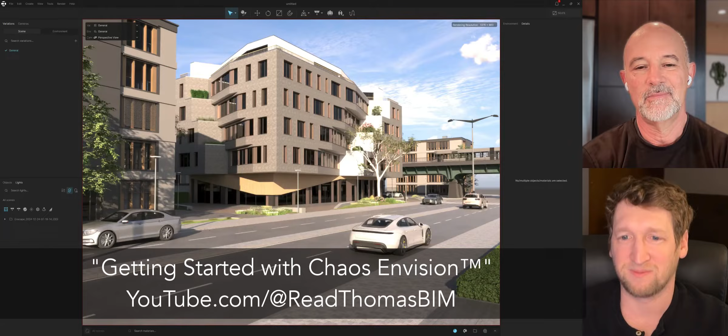When we met last time, it was the day before Christmas. Did you have a good Christmas? Yeah, I had a good Christmas. Awesome, what'd you get that was interesting? Anything interesting? Obviously, I got some cool socks. All right, you got it. Yeah, clothing is always fun. Stocks of socks.

We should have Thanksgiving, like that last bit of November, every month. You get together with friends and eat. My family, we do this. We've been doing it for like 20 plus years now. We play Monopoly, so it's me, my mom, my brother, and sister. It's a tradition. It's just huge smack talking. Every year it's like we're not family right now, we're enemies right now. We get really intense and serious about it, but it's fun. It's something we look forward to every year.

So any obscure rules that have evolved into your family's tradition? I've heard we play it wrong. I'll post the start of it on Facebook, and we have a bunch of family and friends that comment on it every year, like, "You're playing it wrong," or "That's not according to the rules." So I'm waiting for Monopoly to comment on it one year. Are you having fun though? Oh yeah, it's a great time. My mom started it when we were kids, about 20 plus years ago, and we've just been doing it ever since.

We did the free parking thing wrong apparently, so we recently changed the rules. I think we're playing it correctly now. Yeah, whatever's most fun. Smack talk and Monopoly. What'd you get that was interesting? I got a T-shirt that says Casa Bonita Dive Team 1974. Okay, that's cool. If anybody knows what Casa Bonita is, there's a documentary on Netflix about the renovation of Casa Bonita. I would highly recommend. I'll have to check it out.

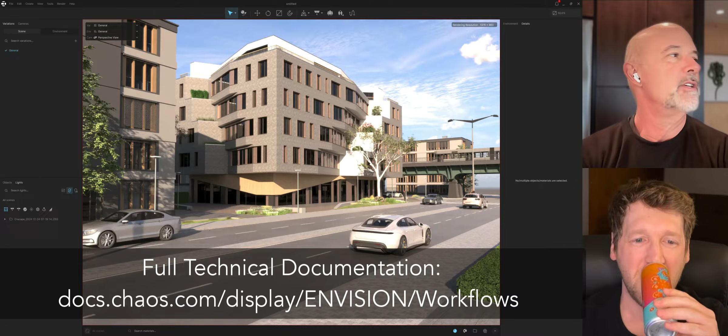All right, so we're going to talk about Envision today. The last time we chatted about this, it was more of an introduction, like how do I get my stuff out of my design tool and into Envision, and then a quick walkthrough, nice and light, 15 minutes. Today we're going to do a deeper dive, so we don't even need to open the design tool. We're starting with Envision, so let's talk about where this fits in the workflow. If you're in your design file, say SketchUp, and you push start, there's Enscape.

But then you want to take it to the next level. Or let's say you have a really big project, or you want to include the site file and you've got files from both. What's the problem you think this is solving? This will handle large scenes. I'm sure a lot of us experience this when a file gets too large. What's a large scene? Like, gigs? Okay, that's big. Gigabyte files, multiple linked files in Revit, or another really cool thing is if you are working with multiple different design applications.

So say you've got the structure in Revit, and this cool crazy facade in Rhino or SketchUp. You've got multiple different design applications, or you're doing something in Vectorworks or ArchiCAD. We all know trying to combine files into one design tool and then starting Enscape is hard. Whereas with this, you can export each of your design files and combine them into Envision.

Exactly. It's also when you get really small files and you start set dressing. I find that people download soft furnishings from the SketchUp warehouse and put them into SketchUp when they're in a deadline crunch and doing renderings. They export pillows that have been designed in Max with a gazillion triangles, and it starts slowing down the model. That's exactly a stress point.

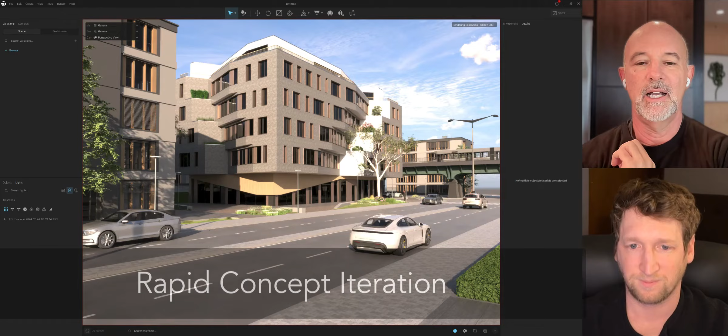Sometimes we can't make the design file do everything we need. Sometimes you need to visualize ahead of the design process, creating concept renderings without stuffing all that detail into your design tool. You want to set dress to a natural, believable level of detail without putting it all in your Revit file—because if it's not in the Revit file, you can't see it in Enscape. This environment will allow you to set dress to an extraordinary level of detail.

You can have very large files or small files that are completely tricked out. And when you need that final presentation piece, you need things that can't be done inside the design application—like animation, like people walking around, animating assets, moving things, giving that extra little life to the scene.

Enscape can do wind animation with vegetation and grass, but if you just need a person standing there doing a little movement, or you want to simulate a crowd walking naturally through the streets or something like that—that's not something the CAD or BIM tools can do natively, so Enscape can't see it.

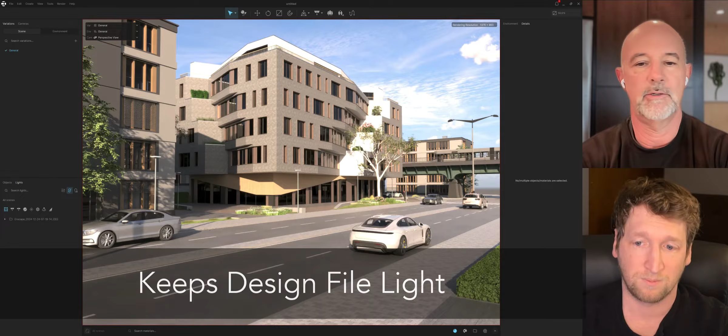So this is your new tool—you can keep it light in the design file, export to Envision, and then apply your materials, apply your lights, do your planting and vegetation, without stuffing all of that into the design file until it's resolved, until you get direction from the design team and the customers.

Another big part is if you already have projects built up where your architect or interior designer is already using Enscape, and they've placed assets like trees, and already worked with materials they want—that'll translate across. So for a campus project as you're designing, or for a large project with another phase, you can simply add that to your project.

You can further refine it inside here, and it's a 100% ray-traced environment, so you're going to get much better reflections and much better quality than you would with Enscape, and it maintains that ray tracing the whole time, unlike some other tools. It takes a little more time, but the quality is higher.

You can animate objects, and there are other features. I'm thinking in terms of—you can render animations, and you can also render still images. If you're in here and just need a still image, you could render that too.

Those are the main products you would create. This is still very much in beta, so it's by no means final, but currently you can do video and stills with it. What's really cool is one of the pain points we ran into with Enscape was you could only do single shots.

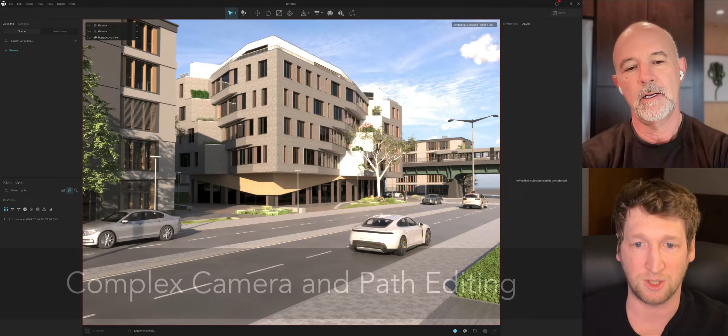You could only go from here to here to here, or around a corner. But if you wanted different camera perspectives, a more cinematic approach to a video—like a shot panning left to right, and then another going top to bottom—you'd have to create each one of those paths individually, export those videos, and then combine them in a different video editing program.

It's not just about the technology, it's the person too. If you've got someone with that cinematographic experience, Enscape is an easy tool you can use to do difficult things, but it's going to be hacky.

Whilst this seems to be a little harder tool to use, you can do things easier. It's more geared with presentation in mind.

This is where you can do more advanced camera animation, like rotating the camera and banking the camera, rolling the camera. That's something I'd love to have in Enscape, but we can't do it exactly yet. So you can do all that with inside of here. You can attach cameras to paths, and animate along the path too, and animate all that independently.

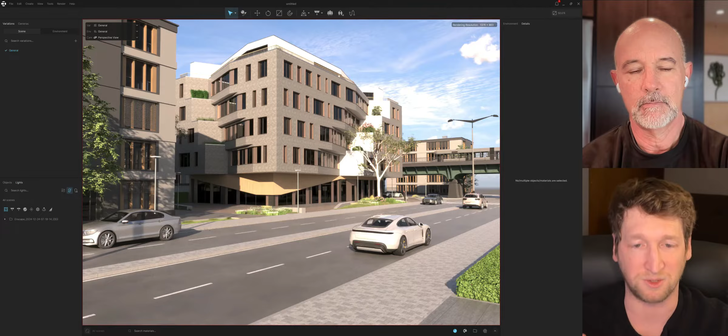And you can also edit or animate objects that came from design applications. So like a simple door opening and closing, you can do all that inside of here as well.

So let's do lights turning on, turning off, or something. What do we want to do, lighting material animations? Is that a good deep dive?

Talk about lighting. The thing is, from my caveman brain, early in the design project, I don't put lights in the project. I just put studio lights because I don't want to put individual lights in the ceiling, but I do want a lantern effect. So instead of going through this process and putting all this detail in my Revit file, when things are going to move and change, I just use a studio light. So let's say this project has been exported, but there are lights in it, or there needs to be more lights in it. What is that next step to affect the lighting and to see how that effect is going to take place in real time?

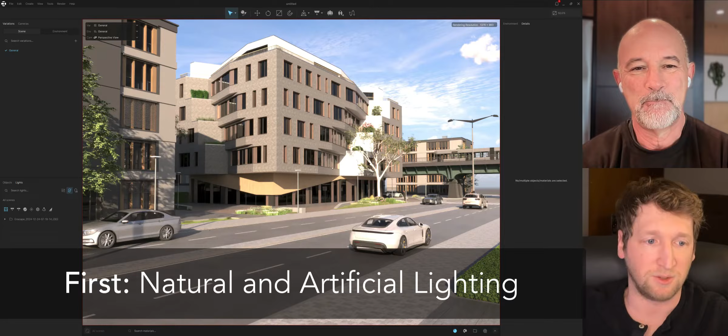Sure, show me what we can do. We could talk about the sunlight too, as well as natural and artificial. Let's do artificial lights first.

So this project was already built inside of Revit. This is our sample project that you can download from our website. It's going to bring in all the lights that you've already placed inside of Revit. So if you're just placing studio lights for something, it's going to bring all those across here. Anything that's a light object category in Revit is just going to come across.

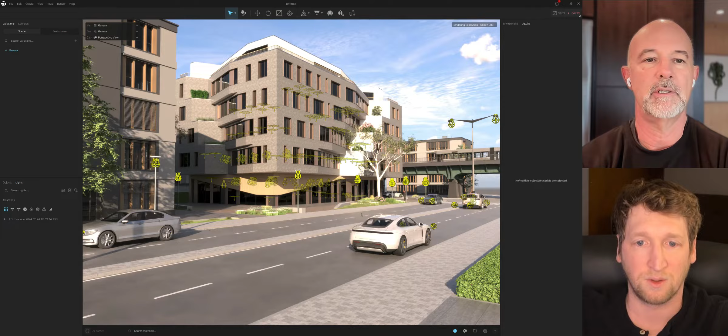So let's say these lights inside of here are great, we just placed them, but we need to make them a bit brighter, or we need more, we can do all that. We can click on the light, and then control the parameters of that as well, all inside of here. So we can increase the intensity, we can change the color, things like that.

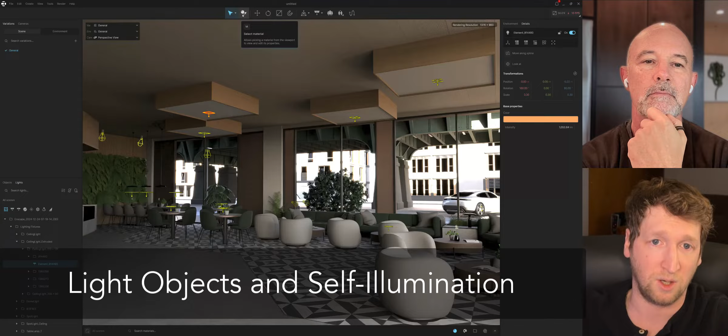There is also a self-illuminating material option. So if you pick our little eyedropper or select material option, you can select that, and then you can enable self-illuminating, and then adjust that intensity as well. So we can see instantaneously what that's doing for us here.

Or like you were saying, if you just need to place more, just for more of a presentation piece. What are they called, studio lights or ambient lights? Revit has that studio light that has no geometry except for the light object, just for illuminating corners and getting rid of dark places in your rendering. More like filler lights. Yep, so we have those as well inside of here.

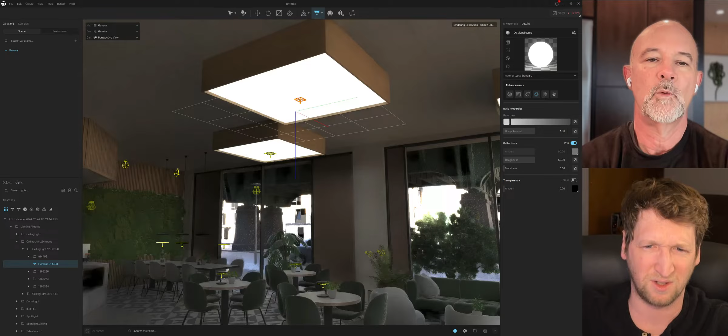So you can also create rectangle, disc, and sphere lights for now. What you can do is simply click, say, the rectangle light. Let's say we want to add a rectangle light inside of here. All I'm going to do is click in place, and then we can see I can just drag that out, and now I can further even adjust that as well. But we can see that's helping illuminate the scene as well.

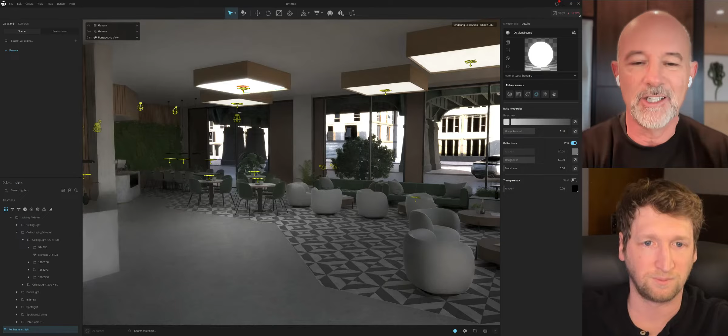I mean, if someone's built a light and they haven't put a light in it, or a light like this where the lens is actually illuminating, the lens is illuminated because of the light that's passing through it. That's a tricky thing to do in Revit, so you add self illumination of the geometry.

But if the light's been built and you're just trying to get the idea out there and someone hasn't added self-illumination to the material, this is nice because you don't have to do the round trip of going, could you fix your lights?

And then re-export? You just do it. Exactly. And then also they're visible during the day. I love Enscape, love those light blooms during the day a little bit more.

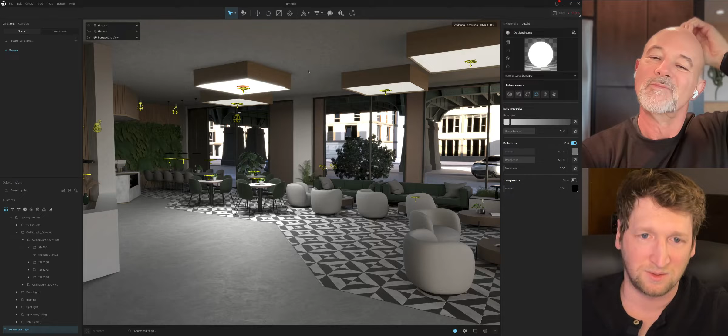This is the companion to Enscape, it's another part of the workflow, and someone's going to go to that next level of detail when you're trying to present. It complements what Enscape has already done. So I like it. And you're not dependent on round tripping back to the design tool to get it to work in Envision.

And what about the sky vault? What were you saying there? I mean, this is your lighting. The lighting objects come through, you can augment them, you can add them, and then you've got the natural illumination of the sky vault.

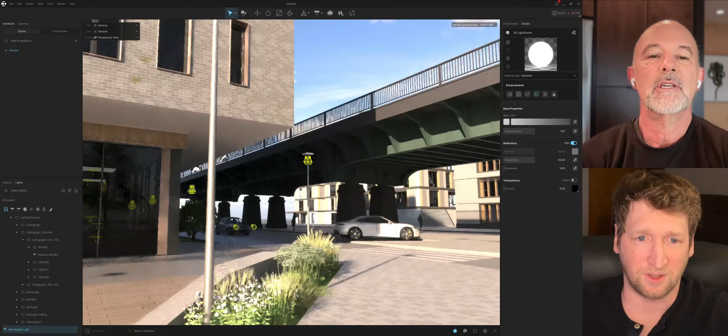What's important about this, let's get a nice shot here so we can see. Notice the clouds here. Let me turn off all my light sources. Those are all the same exact ones that are in Enscape, so they're all procedural as well.

Turning off those light sources, does that turn off the light, or is that just turning off the visual state of it? It's just turning off the visual indicator. Okay, gotcha.

So if you go to the environment tab, this is where you can control the sun, you can geolocate it, you can control the time of day as well, all with inside of here. And then you can control the elevation as well. Go to nighttime mode as well.

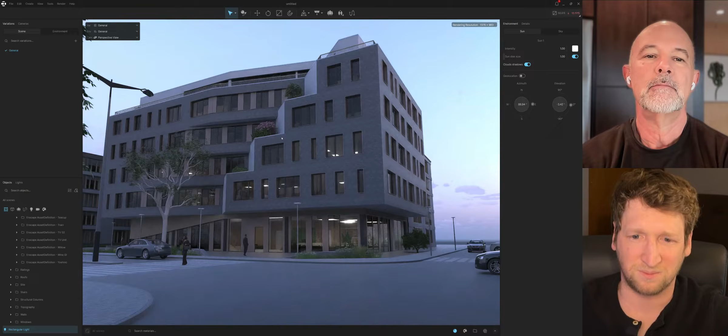And then you can see, oh there you go, there's a lantern effect with the lights. And then you can even go to even darker mode too, so you're getting the clouds showing up. So even for still images, this is awesome.

Absolutely. And then in the sky tab, this is where, again same with Enscape, you get to control the density of the clouds, the variety, longitude, we can control the altitude as well.

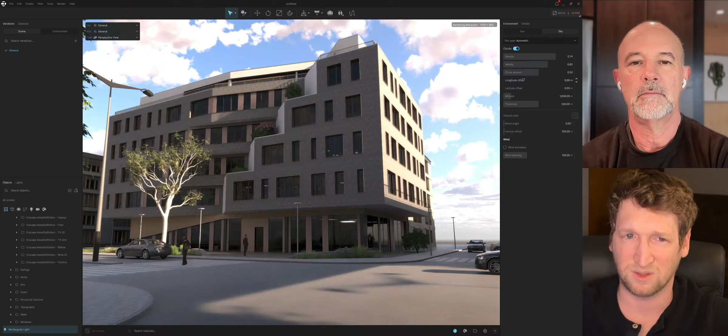And are you rendering in the cloud with Envision, or is it locally done? Is it locally processed? Locally.

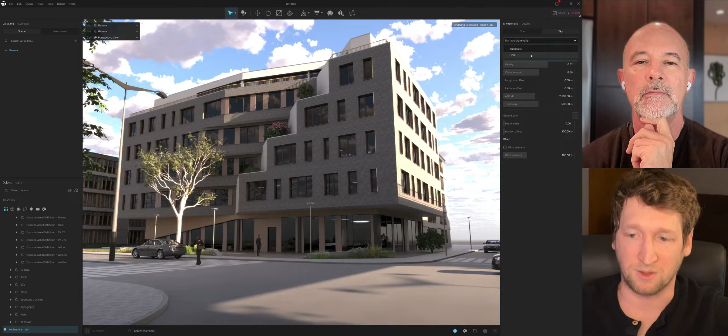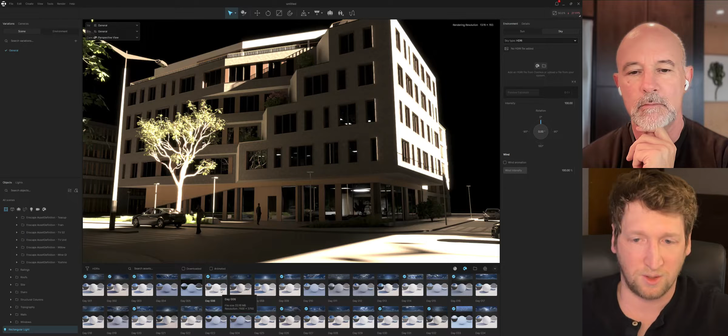And then you also do have the option as well to do HDR files, so a couple different ways you can do this. You can utilize Chaos Cosmos, which you can access down in the bottom corner here, and this will pull to the bottom tray. This is where you can go through Chaos Cosmos library of pre-built HDR files. Think of Cosmos as, for those that don't know, it's basically Chaos's version of the Enscape asset library and material library. This is just called Cosmos, which has 3D models, HDRs, materials, much, much higher quality as well.

And what you can do now is, we can scroll through any one of these that we want, and let's just click and drag it into my scene, and there's going to load in for me. And now I can rotate this as well too, and see the effect it's having on my scene.

We talked about natural lighting, artificial lighting, HDR sky vaults. Can we talk about materials? Sure, we can talk about materials.

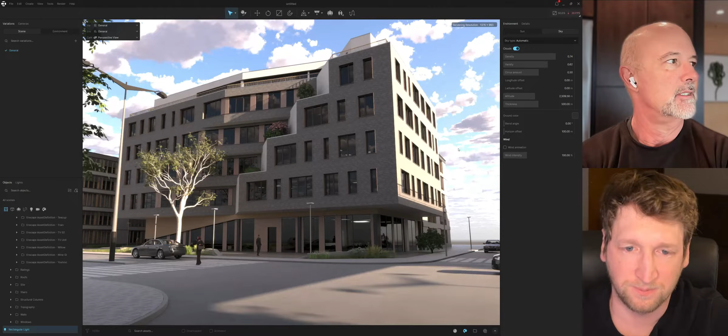My favorite topic. So the thing is, if someone's designing this, what it is, where it is, what it's made of, how it's assembled, there's a process. And if you're just trying to figure out the geometry of this and you've got an idea of the materials, that may be sufficient for early presentations, but you don't want to keep going back to the design file and iterate in order to come to resolution. Even in Revit, it's hard to do that, like if you're creating design options to show materials, especially on the fly, like with the customer sitting there.

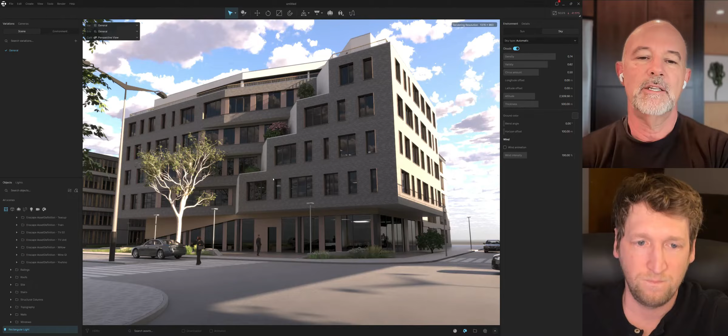Yeah, so using this and actually investigating different material options as different, what was the word you used for the different options? Oh, the different variations. Variations, variants. Yeah, that's a new word. So you could go, oh, I know this is brick, but what if I want it to be different kinds of brick or different kinds of material? Let's investigate some ideas and not weigh down the design file with all of these options. Let's take it offline, think about it, figure it out, and then we'll go back to the design file when we've got some resolution.

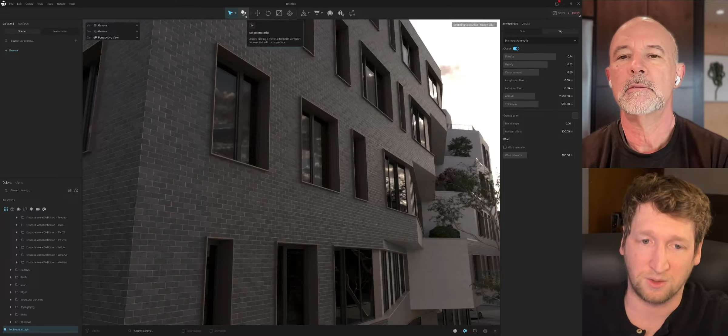I mean, as far as adding materials, how do you do that? How trivial is it? And how would you save some options if you want to see different variants? Great question. So to start, we have this little material picker up in the top tray. Notice this brings over all the different materials from Enscape. So whatever design application you designed in, it's going to bring those materials, and you can further edit them inside of here. So you don't have to go somewhere else and start dragging new material. You can just modify what you've already got as a starting point. Exactly, and it's going to maintain all the different parameters as well.

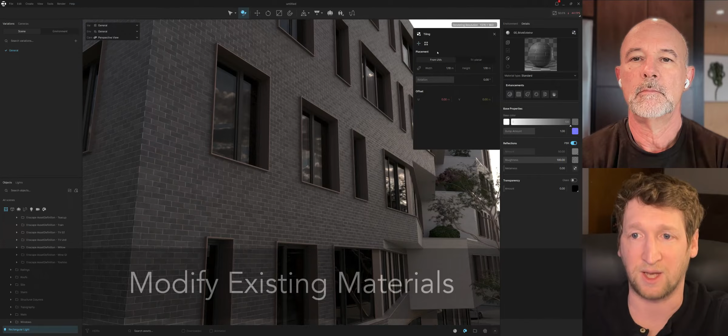So you can control the tint color. You can do some color corrections inside of here too. So really powerful tools all within here. You can control the tiling as well. So this is really cool. I like this feature for the fact that a lot of the CAD tools don't do UV mapping. So it's really hard to get materials wrapping around a corner to get the seams lined up. So you can use what we call triplanar mapping. This will map along the X, Y, and Z axes to maintain it.

So one side of the wall is looking good, the other side of the face is flipped differently. So using this triplanar mapping will make sure they all seam or blend together. And there is a really cool randomization option, so you don't get that tiling or repeating as well. Because with textures, that's a really big thing. You get that clamshell effect where it becomes distracting and obvious that the material is just bonk, bonk, bonk, bonk, like a checkerboard.

And think of how many hours you spend in Photoshop or Paint.net painting out the seams. So this will really help with that. If you do this randomization option, you can blend that so even with the textures as they are, you can make it seamless, just use the randomization option. Yep, exactly. So it really helps out with that.

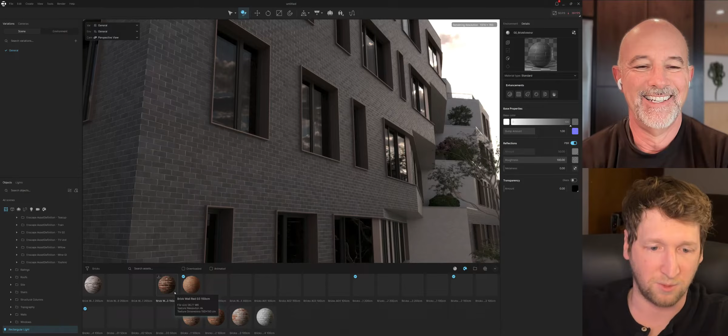But if we want to do different options or see some higher quality ones, we can go to Cosmos again. So let me toggle Cosmos, and we'll go down to materials. Let's say we're talking about bricks. So simple. Let's pick a brick here. If I want this red brick right here, all I have to do is simply click and drag.

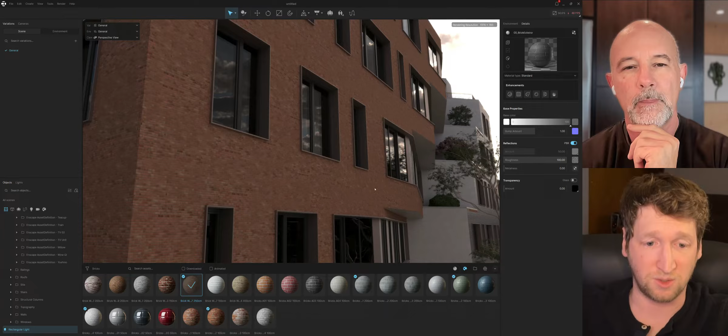What is it finding to apply that, not just on the surface you dragged it on, but other similar surfaces? Is it looking at the material name or something such that everything is getting the same material? I believe it's just looking at the object that has that same material applied to it. Okay. And now that it's inside of here, it looks like it didn't get this one over here.

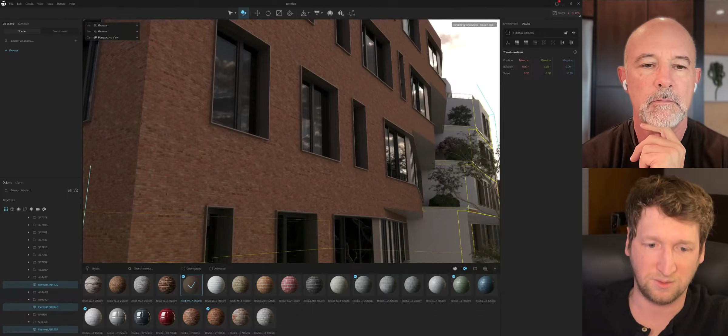What you can do is you can select all. So now that's going to select every object in your model that has that material. And now that that material is imported, you can go to that material. So let me go to that brick material down here. They're all just loading.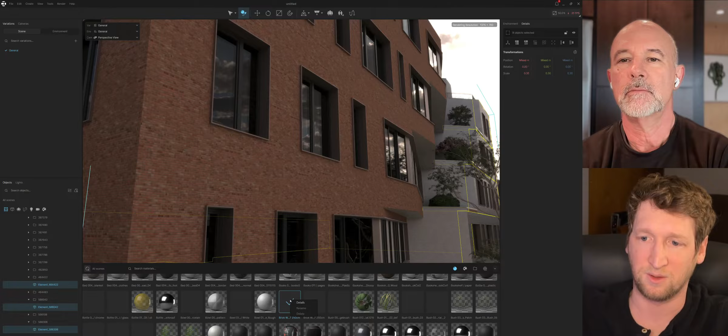So you're not dependent on having to pick all of these things individually. You could pick one as a type and say, okay, now wherever this is, select them all. Yep. So then I can go to details and then I can hit apply to selection. So now everything that had that material associated with it is going to get that material. And then if I need to further edit it, I just have to hit embed and now I can further edit these materials as well, all inside of here.

Could you create one more option? You go, okay, I like this. Let's save that. Let's freeze that. And now let's do another one that's slightly different. How would you do that? So how you would do that is you would create a scene variant. So let's say here, let's undo this, so we can start with the original one. So here's the original one.

So we're going to create a new variant. Oh, what if you want to keep that? You want to keep the original, but then you want to also create variants. I gotcha. So here we'll just say original. There you go. Cool. So that's the original. And now we're going to choose brick var. So now what I'm going to do, again, is I'm going to select all those.

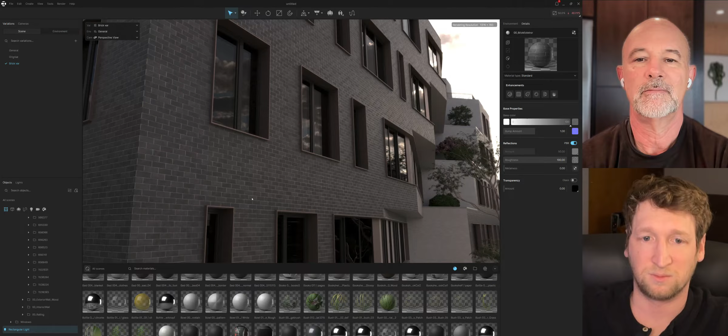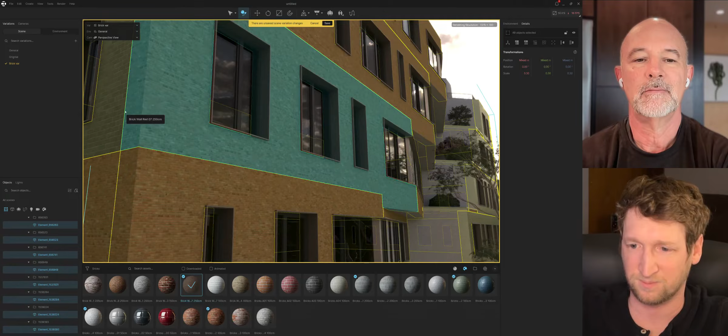I'm going to select all of those. And then I'm going to go to my Cosmos library here, and then I'm just going to drag and drop. And notice up here too, they're saying there's unsaved changes. Perfect. And then what I can do is simply hit save. And now I can flip back. I'm just going to hit escape. There we go. Now I can hit the original and the brick. So now I can see those different variants.

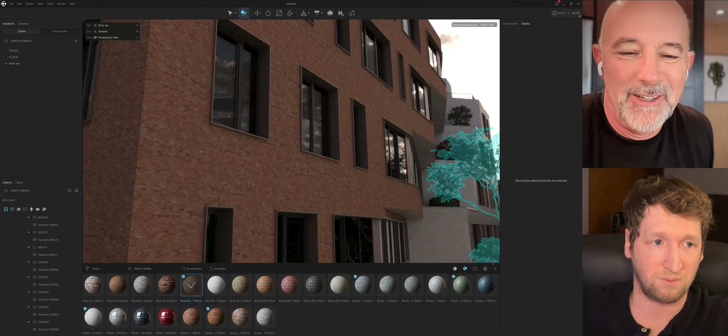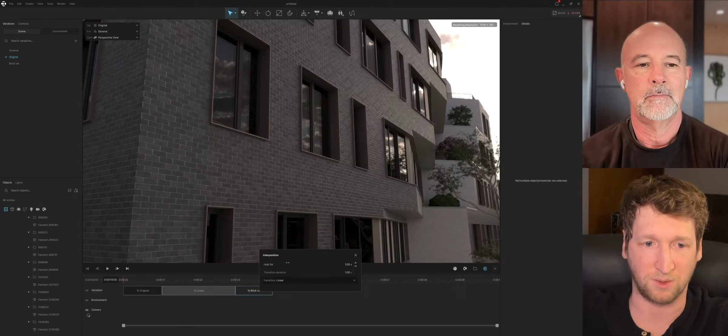There we go. So in your animation, you can preview between these. You can play the options. You can record the options as an animation. Exactly. And then we can see it's going between the two. I love the glass. I love the reflections in the glazing on that second level above. It's just so subtle. So nice. Yeah. Again, real time ray tracing, so you're going to get much better results in real time.

And what happens when the design file changes and the geometry pops out a little bit or something gets tucked back? These materials are going to continue to map to those surfaces. Yep. Exactly. So all that will stay the same. Okay.

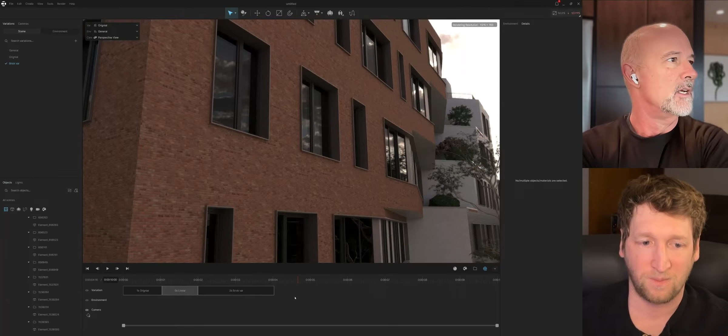Sometimes in the design file there are so many placeholders that don't have materials. So like in the cafe or in that seating reception area you were at the beginning, there was some plush seating. Maybe the geometry is great, the design is great, but it doesn't feel right. It feels a little cold. It's not the green ones; I love the green ones like that.

I can feel that kind of velvety texture, but those single chairs to the side, they're just white. And maybe that's fine. They've been built in Revit or something else and they're good geometry placeholders. They give good intent, but there's not enough texture and feel to them. So for that kind of object, how would you change the material and make it feel more natural? Yeah, so what's really cool is you can also pick any Enscape asset and change the material of it. So if you have manufacturer specific materials, you...

You could load all those in inside of here too. If you just simply click the add material, you can again go navigate to a custom material you want. Or again, if you just want to utilize some Cosmos materials, so let's say for fabric, I can pick any one of these pieces of fabric. And again, we got a lot of materials that we can choose from, much higher quality too.

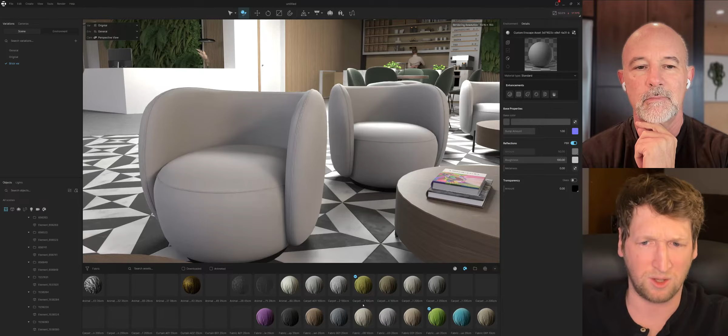So what color are you thinking for this? We got plush velvet in patterns. It's hard to make plush velvet in Enscape. I love Enscape and the materials are great, but some materials have a subtle kind of texture dimensionality to them, which causes the light to reflect or to refract in a certain way, which is indicative of a velvet type of material. And I've seen videos of how to hack it. It's really complicated. So here we have, all of these are different velvet materials.

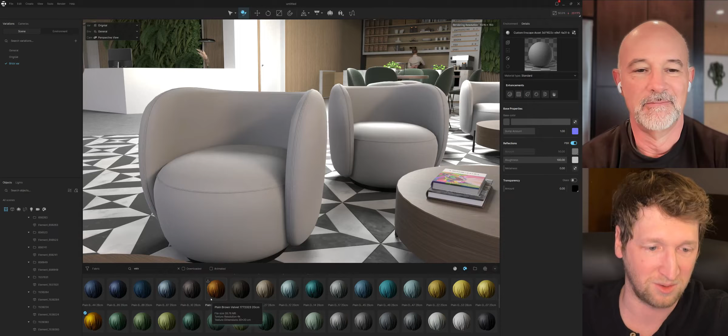So we can choose any one of these. Do we want a color that pops out? Maybe a gold or green. Okay. So all you gotta do is pick the one that you want and then just drag and drop it. It's gonna download that material quick and then it's gonna apply it to that surface.

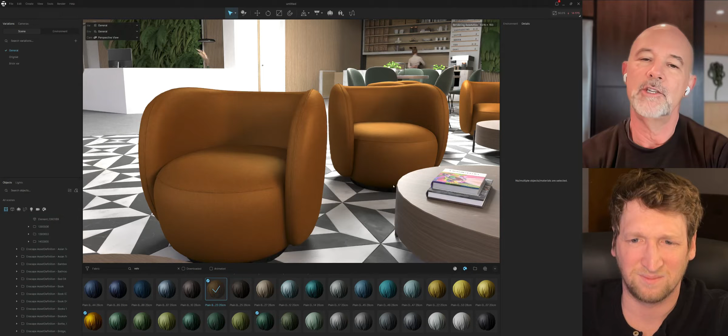So now we can see. That's great. So you might have a placeholder in your design file. You don't know what it's made of, but you just know the shape of it. Now you can do those variations and design studies here. Can you move their location or are those still dependent?

So you've done a first pass in the design file and the idea is right. But when you get into this environment, as a visualization expert, you want to be more specific and you realize the seating isn't quite right. So we should have another chair over here. Maybe we move these chairs. Are you dependent on the geometry, location of things in the design file? No, so that's a great question.

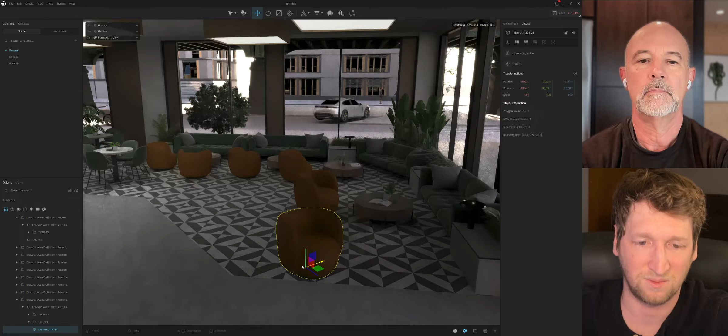One of the huge benefits that I really like is everything that is selectable can be animated. So let's say this chair. Up on the top, we have our move and rotation. I can rotate all these and I can move anything I want independently. So we're not dependent on the design file. We can rotate things individually. We can do object manipulation at the granular level here.

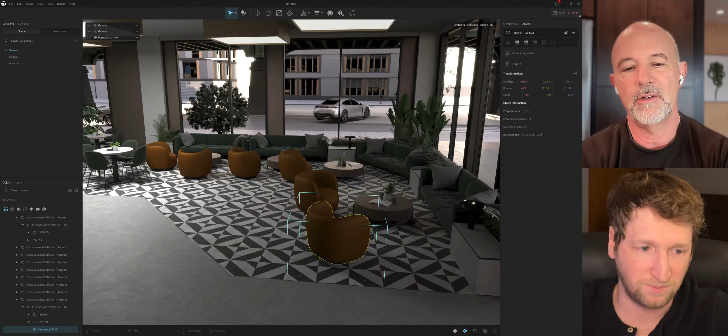And then again, like you said, we could set up a variation too, where everything is turned, or the chairs are arranged a certain way, or the layout's completely different. We can arrange all that. You're not dependent on everything bottlenecking in the design file. When you need to take it offline, you can do those design changes here and go, hey guys, we had changes. Now put this idea back in the design file. Exactly. And that's just using that same scene variation workflow that we just showed with the bricks.

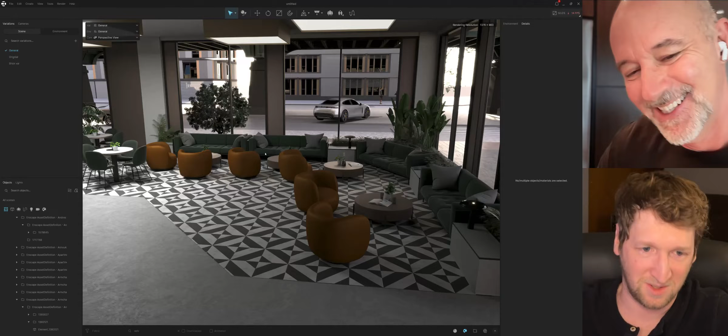Now think of this for like the HGTV effect where things are dropping down where you're building the space, honk, honk, honk. So you can do all that inside of here as well. And it's not just variations of material, you could also get rid of the geometry. You could get rid of all the seating and go, okay, here's another couple of ideas, and those are just more variants. Exactly. So you can have limitless variations inside of here.

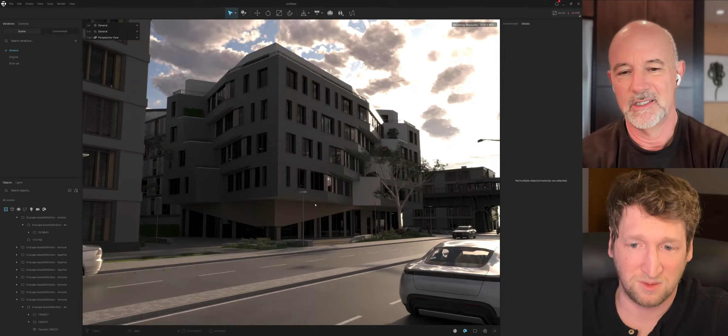No, I don't want limitless. Don't give me limitless. It's too much. I just want like three good ones. And we'll make a fourth one anyway.

Yeah, exactly. And what's really cool too is coming from Revit, you can see on my left hand side here, it's broken up by the different categories as well. Oh, so walls. You still have your object tree, so things are organized in a way that makes sense. Exactly. So this is where you can manipulate anything that's a wall. We can bring that all the way up. So just to show you too, let me delete these variations.

You're showing off. It's good. Oh, it's fun. I really enjoy this tool. That's why you call it storytelling. Exactly. Let's assemble the building, let's tell a story. This is where you get to really wow the clients. It just seems so approachable. Like, okay, I'm an Enscape user, but I'm capable of learning more tools.

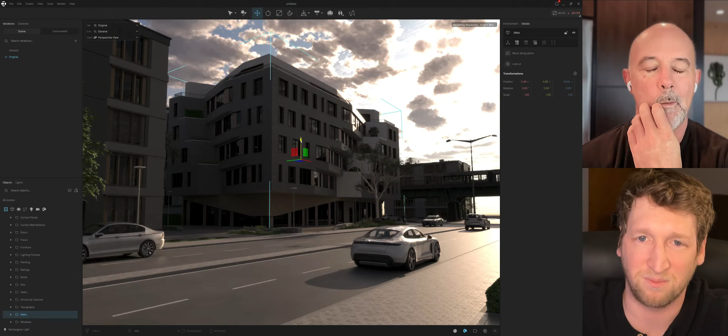Yep. So this is the original right here. And then we're going to move this all the way up, out of frame. Right, right, right. Perfect. Save that. And then this was 10.5. There we go. Perfect. Click save.

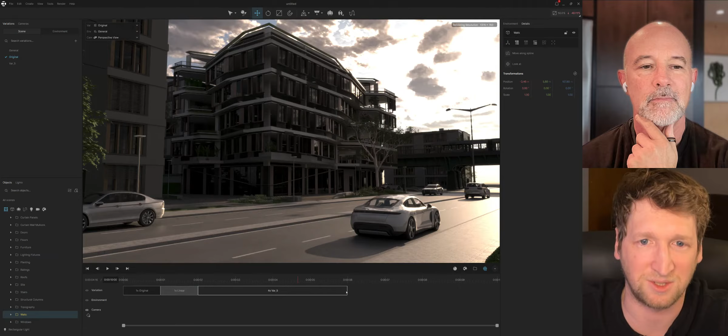And again, now down on our timeline here, variant, and then transition variant. Gotcha. Yep. So really, really simple to do. And we could say that's going to be for 1 second, but we can preview what that's going to look like. So now it's coming down. Boom. There you go.

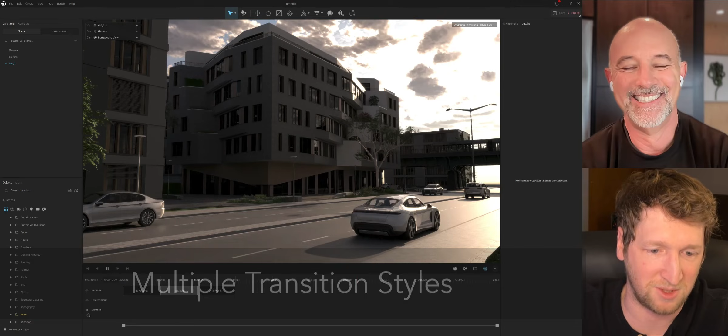Simple to do. Okay. And now another cool thing, you can change the transition type to linear, ease in, ease out. You can even do a bouncy effect if you want, just because. Well, if you want it to settle so it doesn't just snap into place, it's a little more.

I don't know about that. Now you're going all Photoshop. A little too much. Now you're going all PowerPoint. Yeah. But there you go.

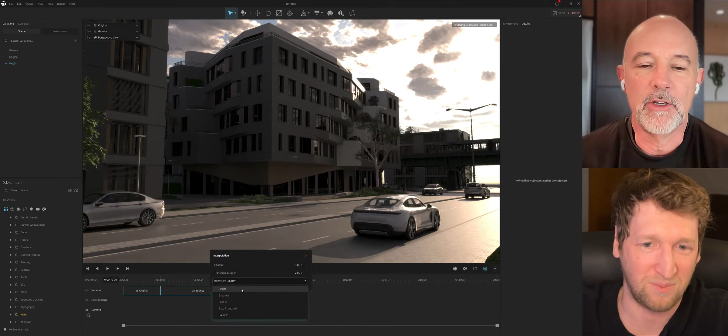You got those variations, and it's approachable. This is for someone who understands. I mean, you spent a life learning how to use Revit. You've learned how to use Enscape, and now you just need to use Enscape Pro or Envision. Yes. So now, lighting, materials. What about animations? What kind of things would you typically animate in a master plan study to make it look more natural? So that's a great question.

So a couple things that you can do is, let's say vehicles for one. Yeah, that's a big one. A lot of people have asked for animated objects in Enscape, and it just seemed like it was too much heavy lifting, trying to stuff all this stuff in the design file before you know what you know. You could technically do it, but the person that's going to do it wants to do it in a sophisticated way and doesn't want to be constrained or bottlenecked by what's in the design file. Exactly.

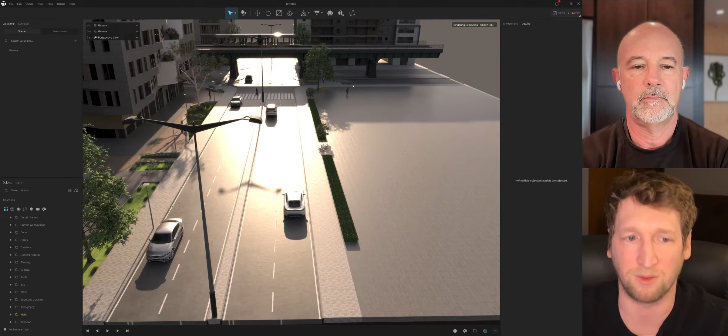And the design tool won't support animation. So Revit won't support object animation. SketchUp supports scene transitions, but you're not going to do animation like you would in 3ds Max inside of Revit, SketchUp, ArchiCAD or Vectorworks. So that's where this becomes a big thing.

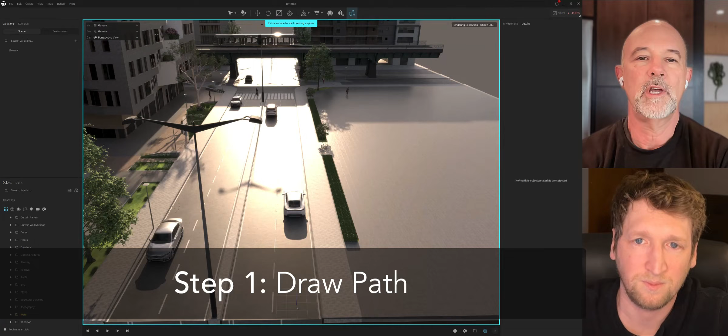So what you can do to animate vehicles is you can do this spline animation. You can click the spline and say, I'm going to start from right here, and move it to where I want. Okay, point to point. Gotcha. So you draw the spline first and then you associate geometry to the spline. Yep, exactly. And then you position the vehicle how you want. There's this option, move along spline.

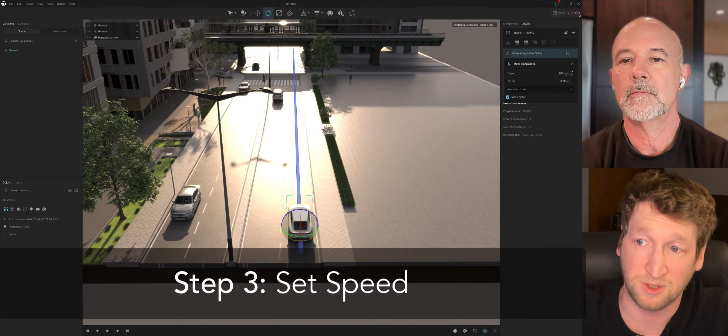This is where you can set the speed. So you can set it to, say, 1 meter a second. And now if you just go to your timeline again and simply hit play, you can see that vehicle moving. It's a spline, so it doesn't have to be straight. It could be some natural shape.

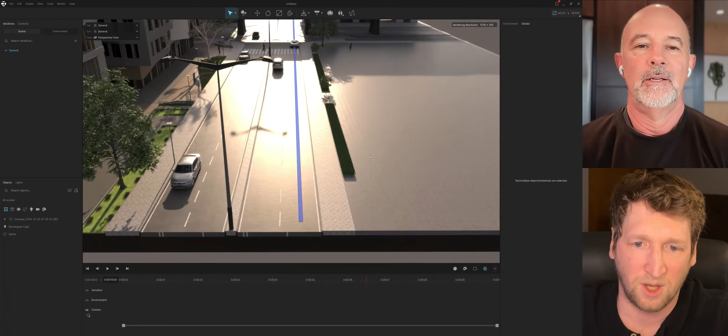Yep, exactly. And you can add multiple objects to that, and then you can offset those as well. So you could have a nice traffic path, and your camera can follow the object. You can track along with it. So in the scenario that we're transitioning through the space, we want the door to open and allow us to go in. You don't just want to go through it. Exactly. So we're going to create a new variation.

So actually, first, this is a cool option that I like. Right now, if I were to try and move this door, you could see the pivot point is just right in the middle. Well, that's not how this door would move. So what you can do is click this move pivot option. That makes sense in Revit, though. My insertion point for that door is centered so it gets wider and narrower. Okay, so you're moving the insertion point, the point of change. Exactly.

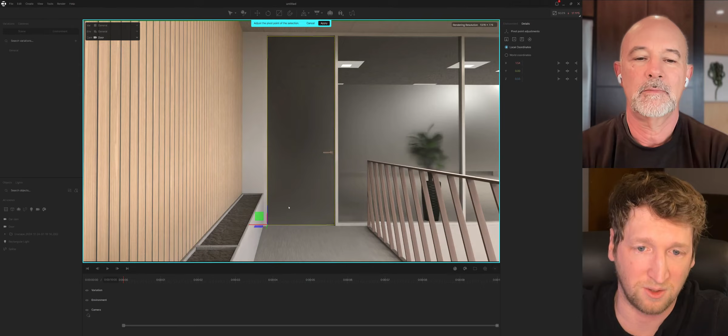The point of pivot. Yeah, so you're not relying on the design tool. Could you go back and set your insertion point for all these doors to be the hinge? Exactly. So this is where there might be a hinge here, or right in the middle, or wherever. So what you would do is just hit apply. That's the point of where the door is going to swing, and you're not dependent on the design tool to get that right.

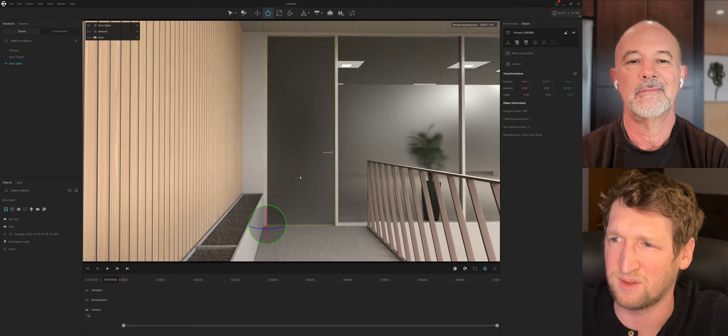Exactly. So again, using our handy dandy variant tool, we're going to create door close, and I'm going to create a new variant, door open. And now in that variant, all I'm going to do is simply rotate the door open. I can rotate it however much I want. There we go. So we'll just say 0 and then hit save.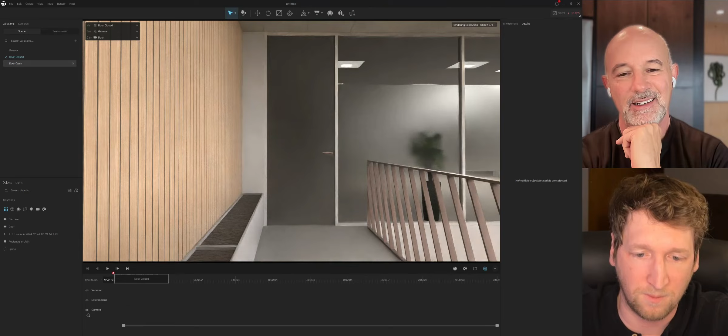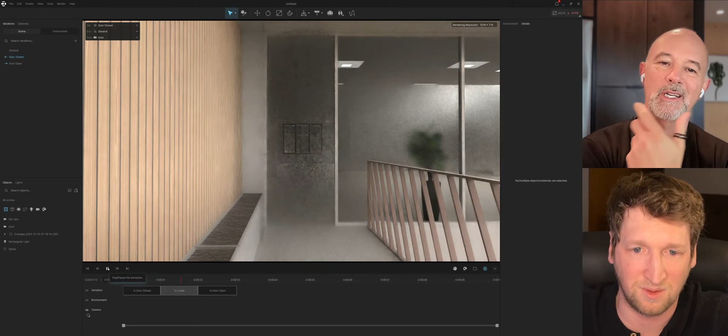And then again, using our timeline, you're going to animate between them. And what's crazy is any variant option, anything inside of here, can be tied to a variant. So this is where you can have multiple different things as well. So again, there's the door open, close. So as your camera approaches, the door's opening. And then I can move the camera to go through that door.

So how you're going to do the crowd animation is you're going to go to this AnimaCrowd option. You're going to set the start point, so let's say right there. And then all you're going to do is hit create path, and then you simply draw out the path that you want. So does it have to be straight, or can you curve the path? We're going to curve the path, and we're going to make that path smooth. And then you save the path.

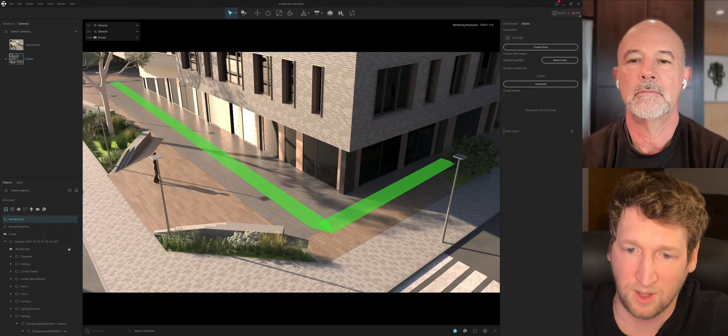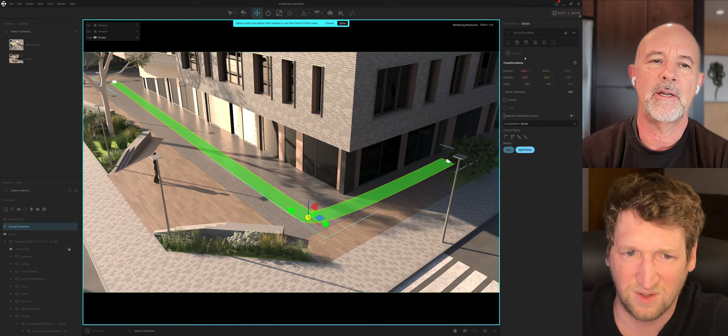Perfect. And now just to make sure I want my path smooth, I pick the spline and I hit edit. And now I can pick this individual point here, and then I can hit smooth. Oh, gotcha. So you can pick point to point to point and then modify. You can just get it down first and then modify that. Exactly. And then I can change the spline thickness as well if I need to. And why does that matter? Is that for the number of people? Yeah, so then we can have people walking both directions.

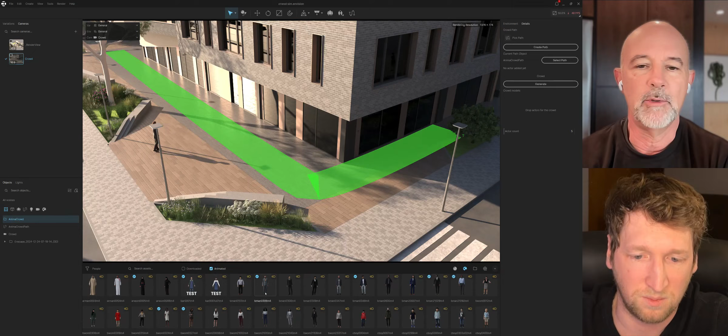So there we go. That looks good to me. And now what we want to do is go to our crowd, 3D models, people, and then I can filter by animated. Now all these people are animated, so they'll walk around. So I can set my actor count. So if I want 5 people, I can just simply click and drag that person on there. Oh, you're just checking the people that you want, and then you're dragging them to that.

Yep, exactly. And their step loop is so natural. They don't walk 3 paces and then skip. Yeah, and we can see those people moved out of the way as well. Here, let's increase this so we can see more. So here, there's going to be 15 people walking around. Wait, how did you just increase the number of people on the line? So in actor count, just increase that. Oh, okay.

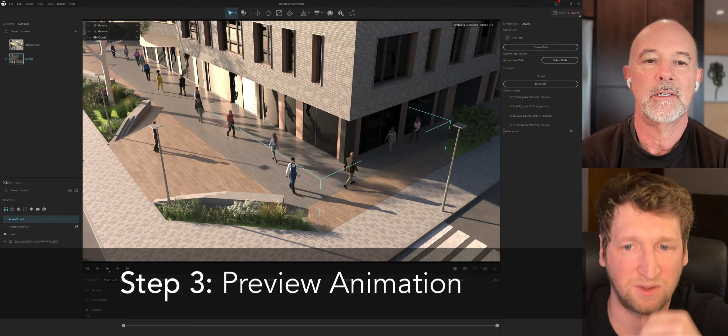And what I can do too is I can actually hide the path because that's a little distracting. So now I can see them walking. Oh, when you're in preview. Gotcha. There we go. And we can see they move out of the way so they avoid hitting each other. Yeah, I noticed that guy in the red shirt just kind of steps to the side a little bit. And what's cool is their head turns to the side. Let's just watch it one more time. Watch, you're going to bump. Oh, no, they don't.

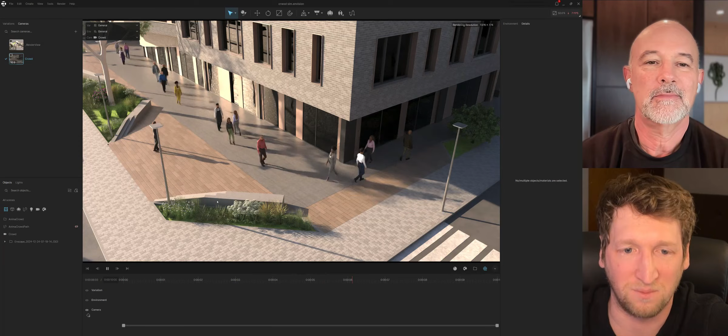And what's nice too is, let's say you're inside the cafe shop. This is where it looks more natural. You've got that activity going on outside. Yep.

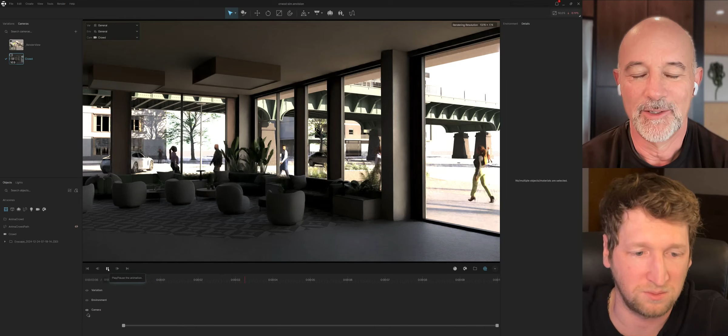Just people walking around, that's great. Some people even look inside - see, this guy just did a subtle head turn to look inside. You can also increase each individual person's walk speed, so you can have somebody running too, if you want, individually - you don't have to make the whole line move at that speed. And you can increase the total duration of the whole timeline if you want it to be longer. So there are a lot of different controls in here.

What else - this is still in beta, so people can kick the tires on it now. What kind of things do you think we should have in the future for this? If someone's starting to use this and going, oh, does it do this yet - no, that's future. What kind of things are future?

FBX, OBJ import - exporting to FBX or importing? Importing FBX. So you can bring in FBX and OBJ files.

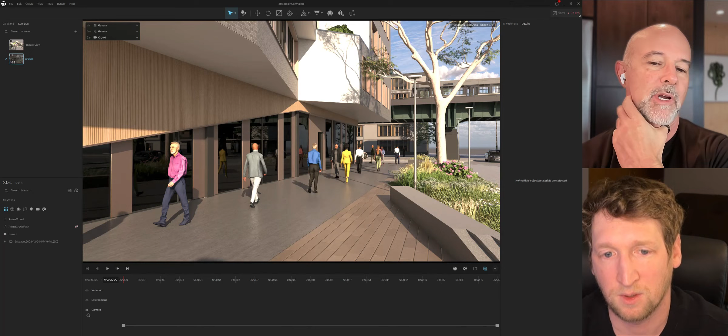Right now it works with the VR scene, so from any design application that V-Ray or Enscape works with, you can export out what's called a vrscene file. Right now, if you want it in some of the design applications, you have to open Enscape and then export the VR scene. But there are also some applications that just have scene exporters - you don't even have to open up the rendering tool.

Weather effects - that's future. It'll be nice to have. What else? It's limitless, what can be done. Batch rendering, particle effects - those are future too. People like weather and particle effects, people are going to want that - fire, smoke.

But right now, you can do so much useful stuff, and you're not dependent on bottlenecking the design tool. You're not depending on the designer who's trying to figure out the building going 'oh, we need more people in the crowd' while they're still trying to figure out the building - you can give it to someone who does that kind of stuff instead. The design applications, Revit, SketchUp, can't do that natively - it's not that the tool can't do it, it's that the person using the tool doesn't have another life to learn how to do that. It's just that workflow gets specialized. The person trying to figure out how the building functions and what the requirements are shouldn't also be burdened with making the crowd more natural. Is there someone who's really good at that cinematographic approach? So this is great.

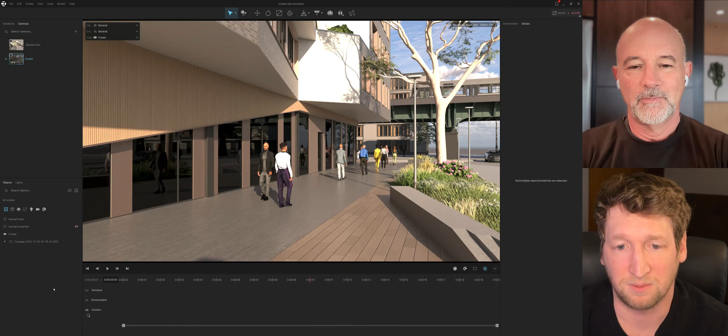So we've done a deeper dive on lighting, materials, animations - I reckon we could do a deeper dive on each one of those things on its own, absolutely. We can get really deep for the next variants - we'll call them variants. Let's do a really deep dive on lighting, a really deep dive on materials - that could be its own thing, we could talk for a long time on materials. And a really deep dive on animation, because animating a car versus geometry in the model versus people - crowds, people seated versus people walking - what are the natural things you can do? So I feel like we've got a few more to go, and we haven't even talked about the still renderings yet, or some of the color correction options that are in there.

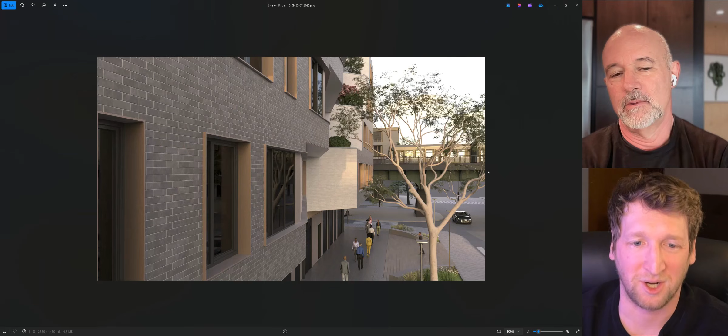This is great, Josh, thank you so much. No problem, and I hope you have a wonderful day - have a wonderful weekend, it's Friday here. They're expecting snow, I'm already getting it, so it's probably coming your way - 1 to 2 inches. It's about 2 inches right now, and still more coming, but it'll keep going - we'll get 1 or 2 inches and that'll be it. They already canceled class today, they canceled class yesterday knowing we're going to get some snow. Oh boy, it's not Minnesota.

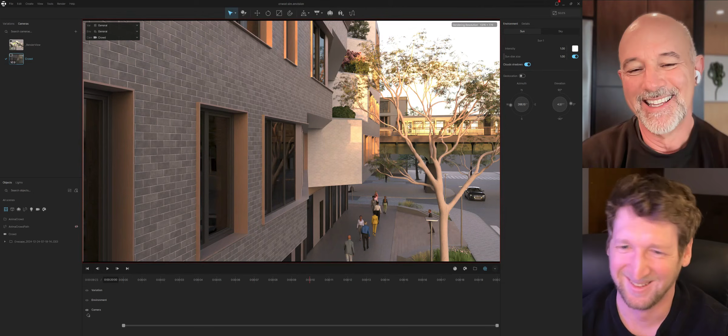Thank you so much, looking forward to the next video - we'll do a deep dive, I guess we'll just follow the sequence, we'll do a really deep dive on lighting. How about that? Yeah, that sounds great. Looking forward to it. Thanks for having me, take care buddy. Yep, you too.